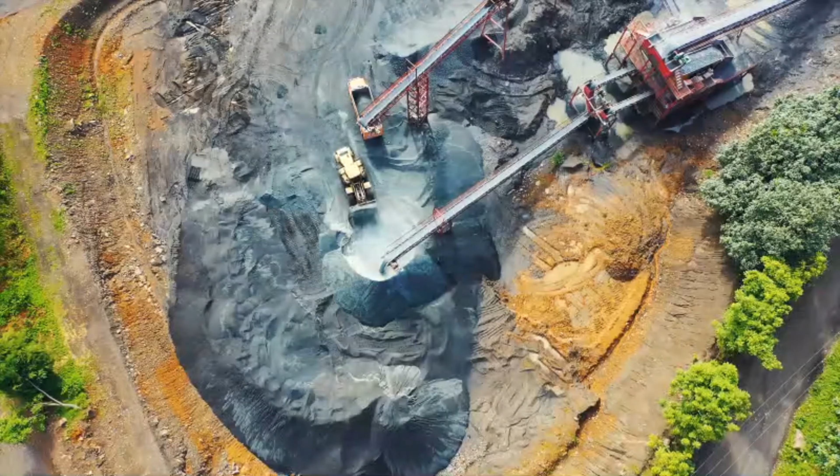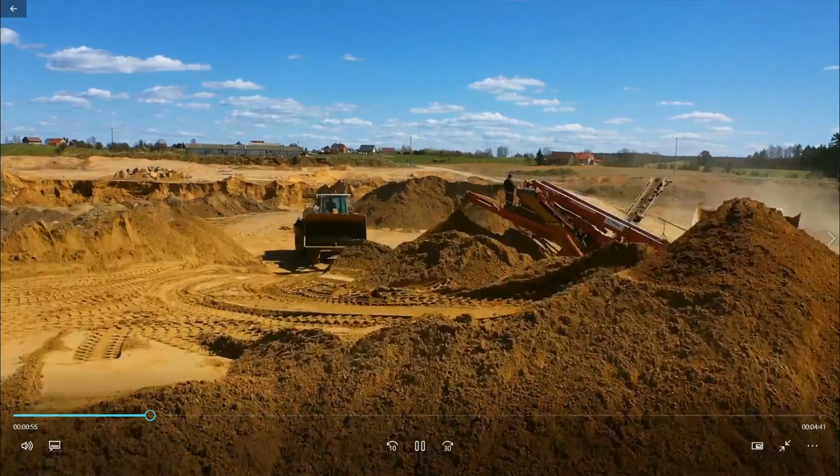But what if we could reduce CO2 emissions from the construction sector by cutting the amount of energy use in building construction and operations? What if we could predict the amount of virgin materials needed before they enter the life cycle of buildings? In this vision, architects, civil engineers, real estate developers and building managers could apply circular economy principles and digitalization to analyze material flows throughout the life cycle of buildings and find opportunities to reduce waste by reusing and recycling materials. The Circular EcoBIM project aims to enable a circular construction model through Building Information Modeling, or BIM.

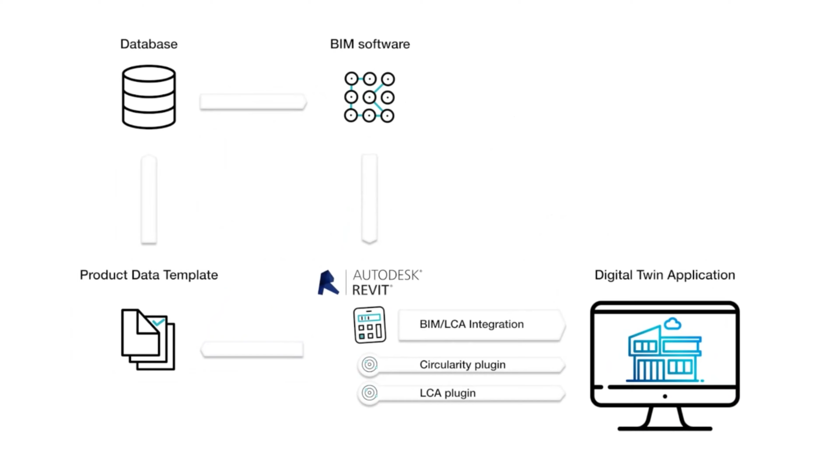The Circular EcoBIM platform integrates BIM tools with the principles of circular economy and the new sustainability framework for buildings called Level(s) Framework from the European Commission. The Circular EcoBIM platform consists of different components for building analysis: plugins for existing BIM software to calculate the circularity and perform a life cycle assessment, a digital twin application, and a database. The platform is demonstrated through a case study provided by Vic Properties, one of our partners.

The Herdade do Pinheirinho, a real estate development located in the Alentejo region of Portugal. The site is 200 hectares big, and 197,000 square meters of holiday villas and other infrastructure will be built.

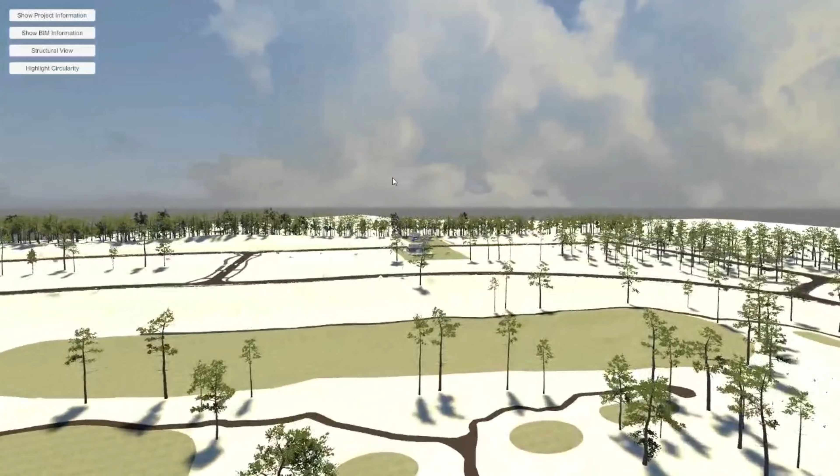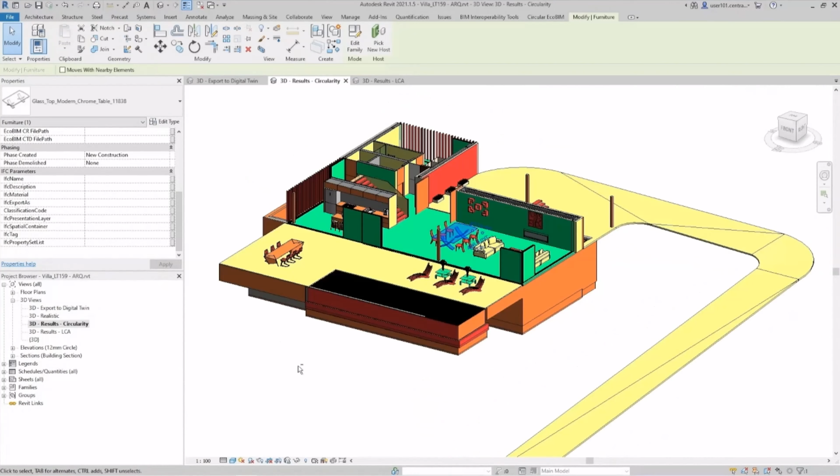The Circular EcoBIM team used laser scanning to create BIM models of the land of Pinheirinho and 3D technology to model the future villas. The goal is to maintain and use these models throughout all building life phases. The BIM models allow the extraction of material quantities and constructive environmental characteristics of products and materials. This information is the basis for a circularity assessment and life cycle analysis, which improve the understanding of a building's environmental performance.

The two plugins for calculating circularity and life cycle assessment are being developed for Autodesk's Revit BIM software. The Circularity plugin analyzes the circular potential for construction and renovation of a building. It allows 3D visualization in the BIM model per construction element, and generates a circularity report indicating the origin of the material and potential end-of-life strategy.

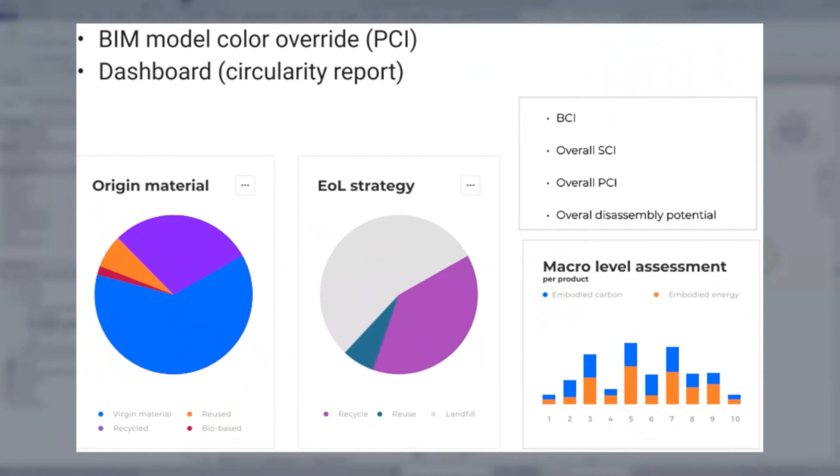The Life Cycle Assessment plugin uses environmental indicators from the database and the building geometry from the Revit model to analyze the impacts of a construction or renovation project. It allows different types of sustainability analysis with a varying range of indicators, depending on the project and user needs. An economic analysis is part of the plugin, which calculates the life cycle cost of the BIM model.

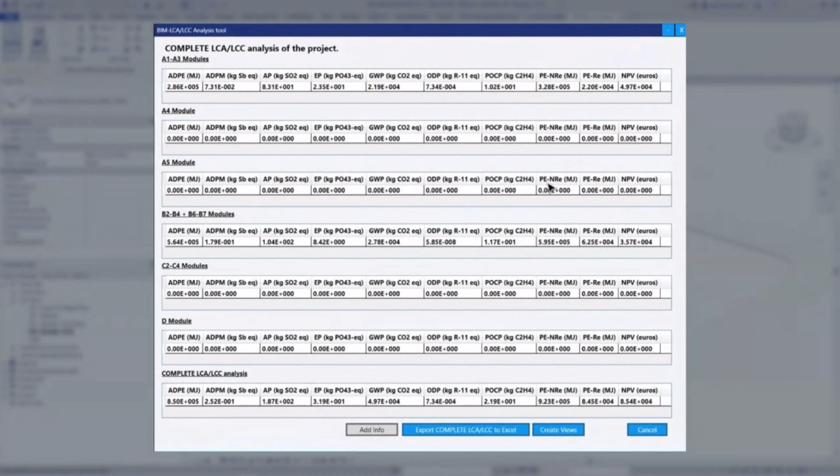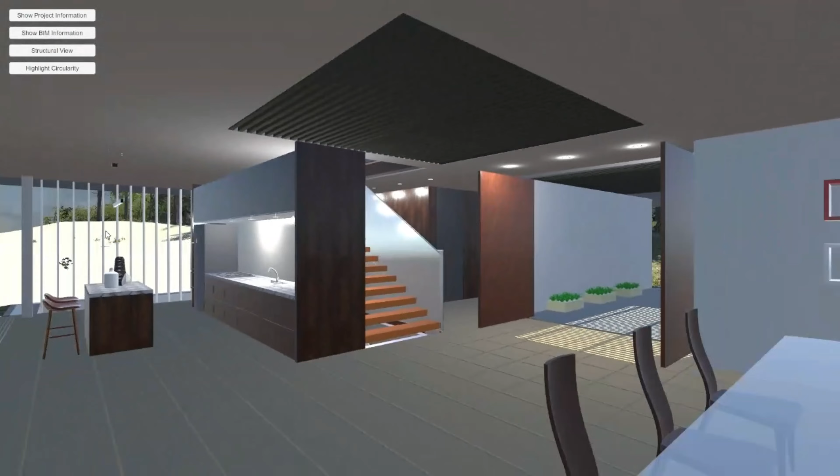A digital twin application visualizes the circularity of materials, use of potentially recoverable materials, and increase of sustainability measures in a realistic building model. The digital twin application also analyzes the circularity potential during the building's use phase. It enables different user functions, including 3D navigation, highlighting the illustration of impacts related to different construction elements through a color scheme.

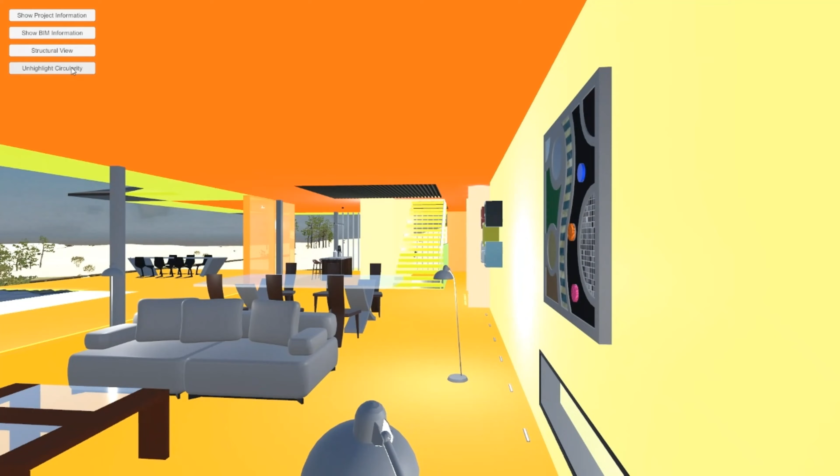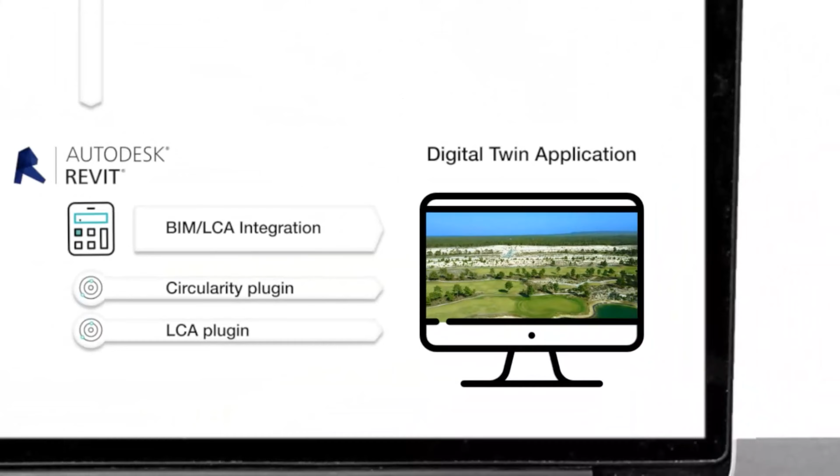Circular EcoBIM aims to help architects, civil engineers, real estate developers and building managers to uncover opportunities to redirect material flows from linear to circular, as well as making early assessments of potential environmental impacts associated to new building and renovation projects, effectively cutting the amount of energy use in building construction operations. And in doing so, reducing CO2 emissions from the construction sector.

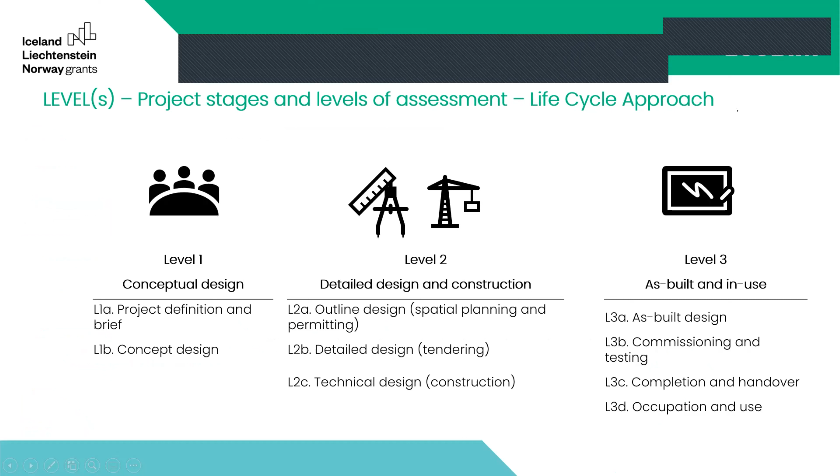So I would like to give you a couple of additional pieces of information that I think are helpful to understand the following presentations. One of these is a better understanding of the levels framework, which was also already mentioned in the video. The levels framework is a framework by the European Commission on Sustainable Buildings.

One of the big features of this framework is that they divide into building levels, so as the name suggests, level 1, 2, and 3. Level 1 is the conceptual design phase of the building project, which is the simplest level. Level 2 is the detailed design and construction phase, where you already have a better idea and can quantitatively assess the design performance of the building and also monitor the construction phase. And then level 3 is when the building is completed and in use.

And then, of course, you have all the details available, and you can monitor and survey activities while the building is in use. The distinction between these 3 levels is important for the different tools that are part of the platform. But we'll talk about this more in a bit.

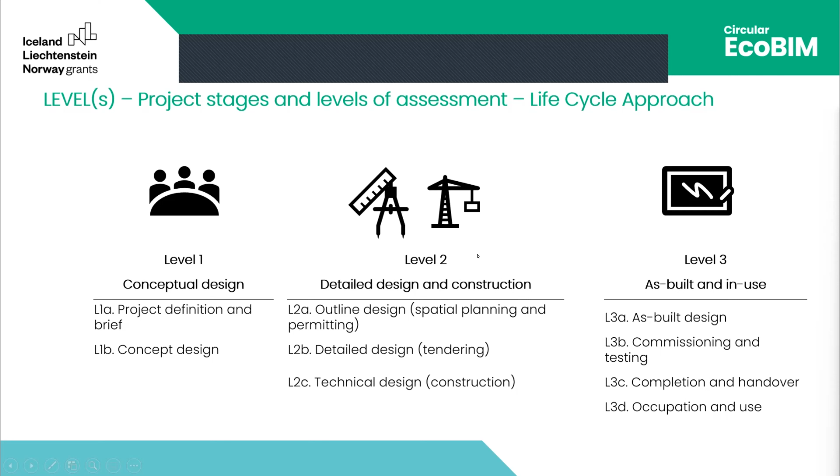So here again, an overview of the platform. You have different components: the database, and the 2 plugins, one for LCA and one for circularity assessment, and a digital twin application. We're going to focus on these 4 tools of the platform in the upcoming presentations.

So I'm going to start by telling you more about the database. Then I'll hand over to my colleague, Joana Fernandes, who is a PhD student at IST in Lisbon. She will tell you more about the circularity plugin. Then her colleague, Teresa Ferreira, also a PhD student at IST, will tell you more about the LCA plugin. And then our colleague, Rui Barata, who is a BIM expert, will tell you more about the digital twin application. As you can see here, the digital twin application is for level 3, and the 2 plugins are for levels 1 and 2, as described just before, referring to the 3 different levels of the levels framework.

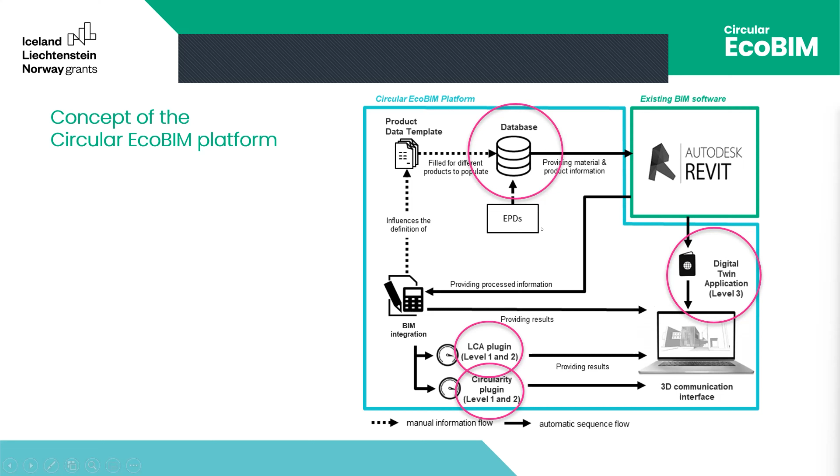Okay, but let's have a better look at the database. The database that we are building for the Circular EcoBIM project is a relational database, and we are following the methodology which you would typically use to assemble such a relational database. That starts by defining the objective of the database, which in our case is, of course, to provide the information for all the different parameters that are needed in the different tools, so that are needed in the circularity plugin, in the LCA plugin, and in the digital twin application. Then, based on that, we can identify entities, and an entity would be basically a table that consists of different parameters.

Then we identify the parameters, also called attributes of each entity. And then we map the relationships between the entities and attributes, and we write that down in an entity relationship diagram, which basically shows the structure of the database.

I'm going to try to explain this entity relationship diagram on the next slides, and I hope it's possible to understand, because it's quite a complex thing that involves a lot of information.

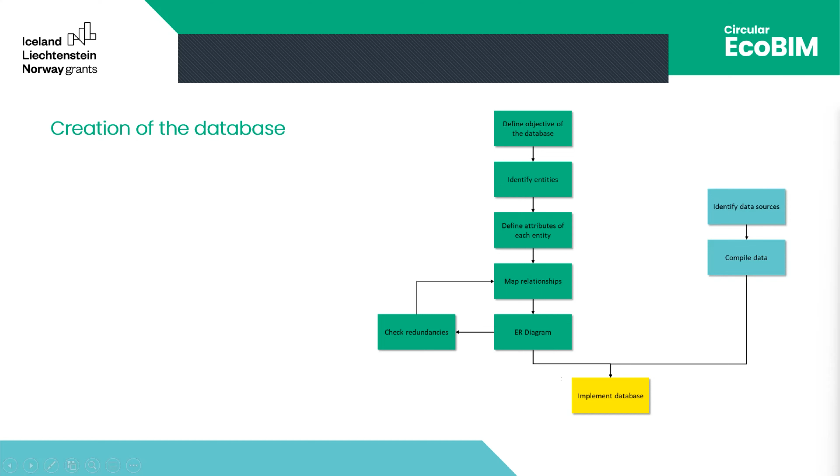That's the skeleton of the database, the structure, and then we have to fill it with information. For this purpose we identify data sources and compile the data, and then we can implement the database. Right now we've identified and described the entity relationship diagram and most of the data sources. However, as the project is still ongoing, we're still developing this further, collecting more information for specific parameters and extending the parameter list if needed.

On the next slide you can see an overview of the most relevant parameters needed to define the objective of the database. You can see them in this column, and here you can see there are different groups. What's important to understand is that we are collecting information about construction products.

A construction product could be a material, or already a pre-assembled product that consists of multiple materials and that you could buy on the market. So this can be a bag of cement, or a brick, or a pre-assembled facade element, for example. Because of that, we need to classify and categorize where this type of product can be used in the building, so that later on the database can be used in an optimized way to provide information for the different plugins. For that, we need to know where the type of product can be used.

Then we also collect metadata - where does the data come from that we're feeding into the database. Regarding the environmental indicators we're collecting, we note down the life cycle impact assessment method and so on. We also look up market prices of the different products by checking online what's the market value of product retailers for different types of products. And if a product consists of multiple materials, we note down the different materials it consists of.

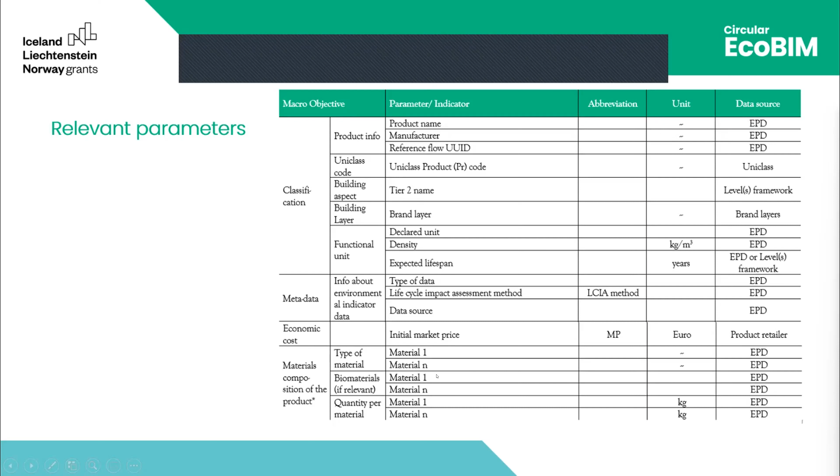On the next slide you can see this big list of environmental indicators. We have global warming potential, which is very well known, but we also collect all the other ones typically found in an environmental product declaration. Most of them are needed for the LCA. Some of them, like components for reuse or materials for recycling, are also needed for the circularity assessment.

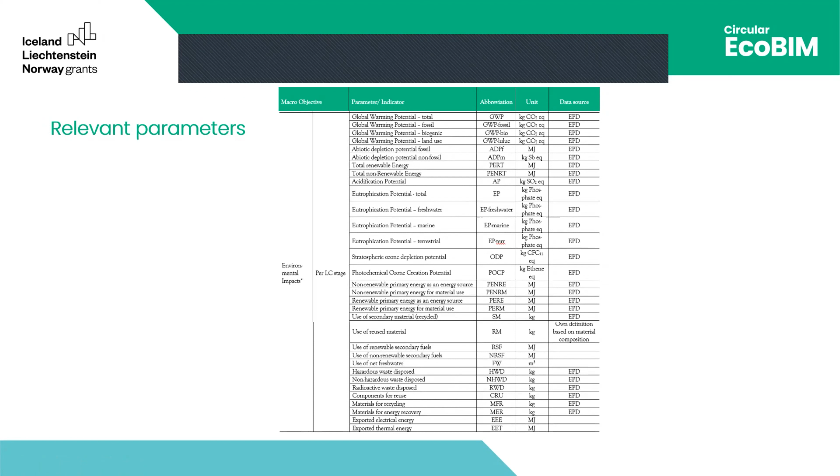And we collect all of this per life cycle stage. So we have, for example, global warming potential for the extraction of raw materials, for the construction phase, and for the end of life phase.

I would say this is the heart of the database - the products table. Here the name of the product is denoted, the manufacturer that produces the product in case the data is product specific. We have a Uniclass code - Uniclass is a standardized categorization system in the BIM community. We note that down, and we also note down the declared unit, which tells us what the other impacts or indicators in the database are referring to, in terms of how much of the product.

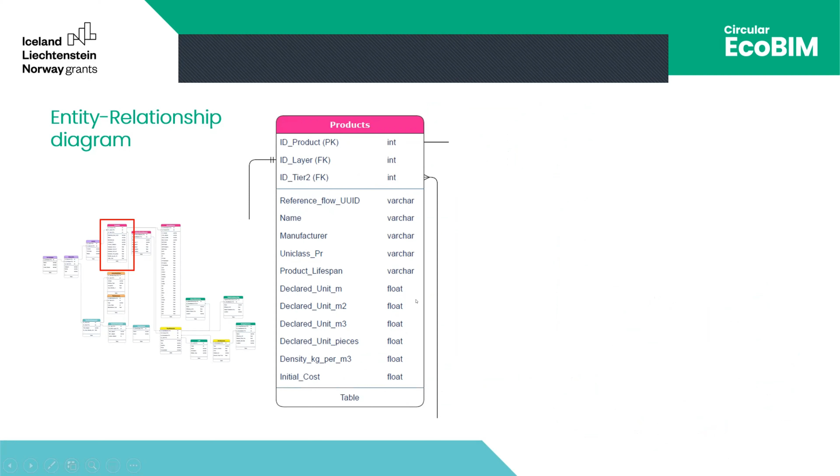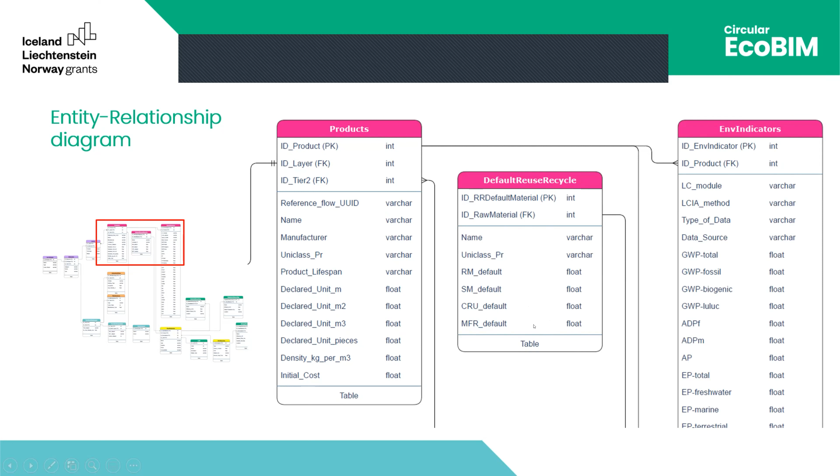This information for products is classified into layers, and the layers into building elements. The building elements are also used to define archetypes. The archetypes are an interesting feature of the platform because what we're trying to achieve is not just to improve the circularity of new construction projects, but also of existing buildings.

What can happen is that if you analyze a historic building, or an older building, you might not have all the information available about the materials that actually make up the building. Then you might want to use one of these archetypes to get an estimate of what you're dealing with.

We have tables on the intensity of use, which express the product-specific intensity of use compared to the market average. This also gives a clue about the expected lifetime of the product, an important parameter for the circularity assessment.

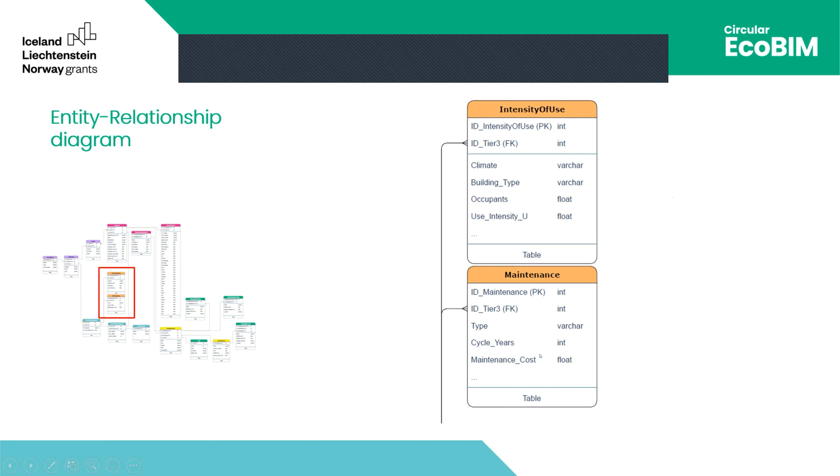We have a table on maintenance where we collect information on how often and how intensely we need to renovate building elements. These three tables then classify the different products into building elements using the levels framework and the brand layers. I have another slide to explain this better.

We need levels and the brand layers to define the hierarchy of the building structure. What we're doing is looking only at the shell, specifically the three brand layers: structure, space plan, and skin. This could possibly be extended to other layers, but that's what we are focusing on. That includes the foundation, substructure, load-bearing structural frame, non-load-bearing elements, facades, and the roof.

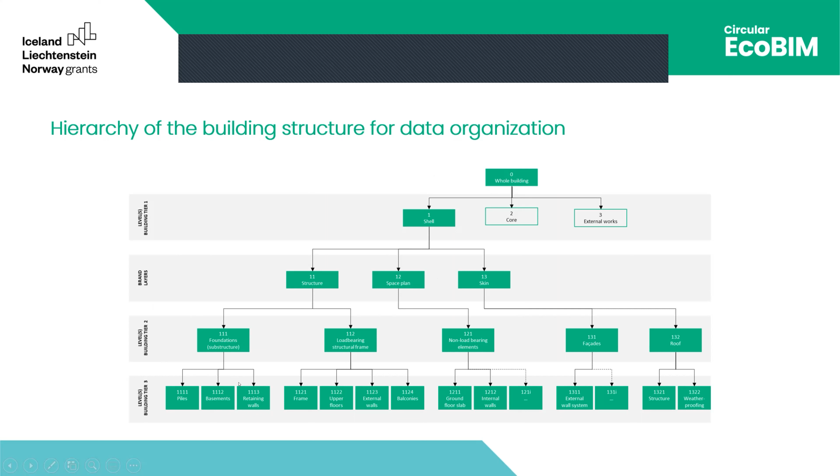We're following this structure because we believe it's very useful for building practitioners who also want to follow the new norms and legislation by the European Commission.

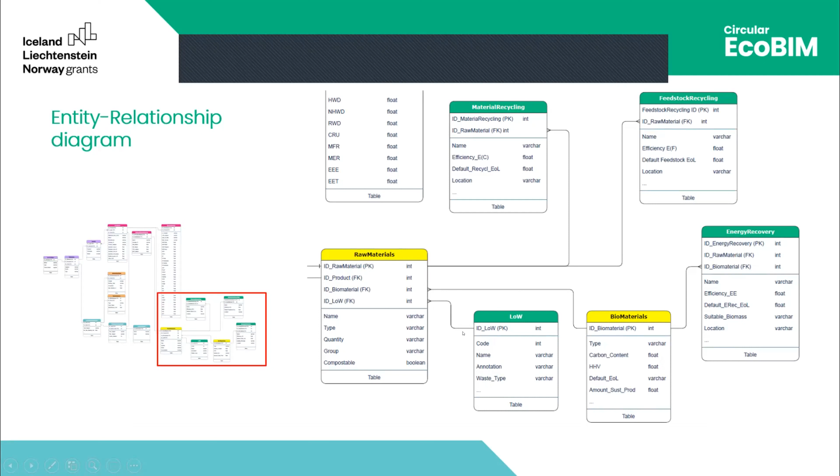This is linked to the type of raw materials that the product consists of, and it needs to be classified by the level of waste that occurred at the end of life of a product, and for which type of material. We also specifically look at biomaterials, which are interesting because of their stored carbon content and higher heating value.

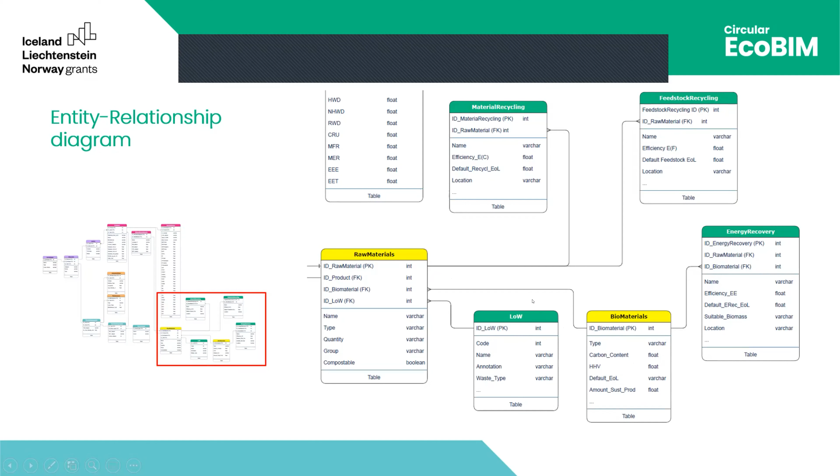I hope this was not too confusing, but this creates the basis for the following presentations. I'm going to hand over now to my colleague, Joana Fernandes, who will tell you more about the circularity plugin.

Joana, do you want me to share the slides, or do you want to share them yourself? Sorry, maybe I can share, please. Of course, of course. Please go ahead.

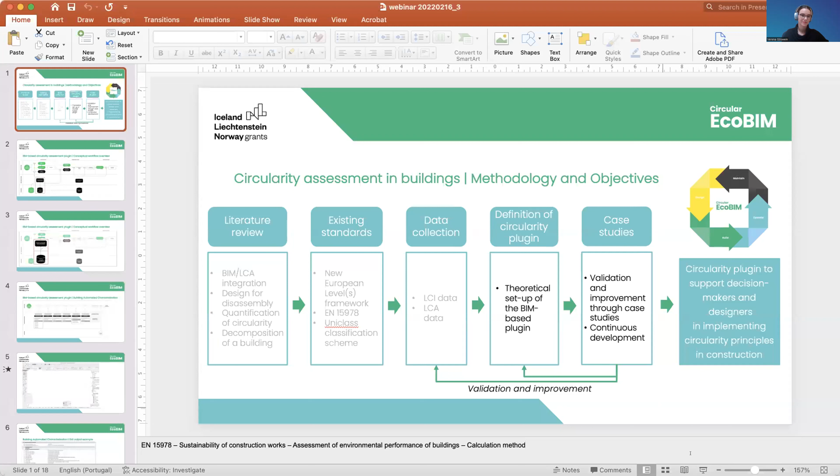Hello everybody, my name is Joana Fernandes, and I'm going to talk to you about the circularity plugin. This is the global methodology we have adopted, which was already explained in the last webinar.

We started by doing a literature review on BIM-LCA integration, design for disassembly, quantification of circularity, and decomposition of a building, together with existing standards — namely the new European levels framework that Verena already mentioned, EN 15978 on sustainability of construction works, and the Uniclass classification system, a classification system for construction elements that we are going to use for circularity assessment.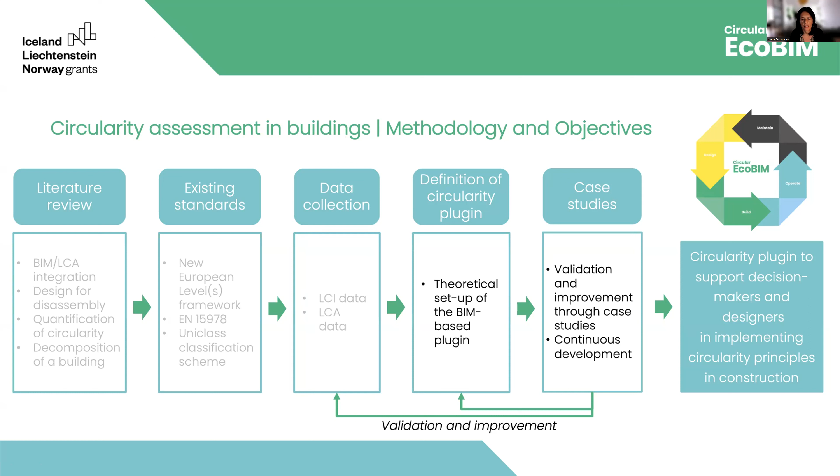We have also been collecting LCI and LCA data, and now we are defining the circularity plugin, validating it, and improving it through case studies. Our goal is to create the circularity plugin to support decision makers and designers in implementing circularity principles in construction.

So starting from the BIM-based plugin, this is the conceptual workflow — an overview. Starting from the top left, the design team has a new project. It can be a new building or a refurbishment project.

The workflow is exactly the same, except for the existing building, because it is more challenging, as Verena mentioned, since sometimes we don't know which materials the existing building has, and we cannot destroy it partially to find out what the constructive system is. So when we start the project, we create the geometry and assign this Uniclass code to the construction elements.

If it is an existing building, we assign the constructive characteristics. When we don't know them, we can perform this building automated characterization, which is based on archetypes. This characterization is linked to a building characterization database.

How does this work? The archetypes are theoretical models based on statistical information combined with literature review and some real case studies to test this methodology. So the user starts by answering some questions in order to determine which archetype the building belongs to.

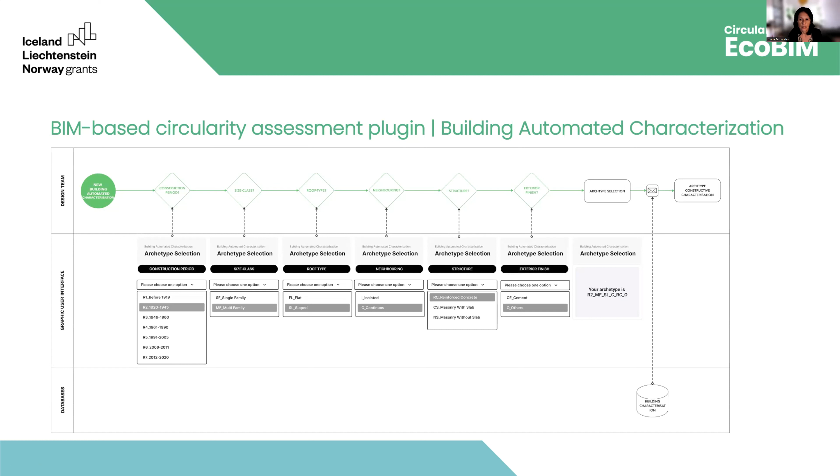The first input is the construction period, then the size class—single family or multi-family building—the roof type, flat or sloped, whether it is an isolated or continuous building, the material of the structure, and the exterior finish. With this information we get the archetype code.

I'm going to show you a little video. This is a graphic user interface in ArchiCAD, because we started developing this plugin in ArchiCAD, and now it is being programmed in C# to be used in Revit.

So here it goes. You select building automated characterization, then you answer the questions I explained: period of construction, multifamily, sloped roof, continuous, the structure material, and also the finish. Then you get this list of materials.

I don't know if somebody has the mic on.

Here you have on the left the shearing layers that Verena mentioned, together with the constructive elements, and on the right all the materials that characterize these construction elements. You can see these chains on the left, and if there is some construction element that does not match the default value, you can change it, as shown.

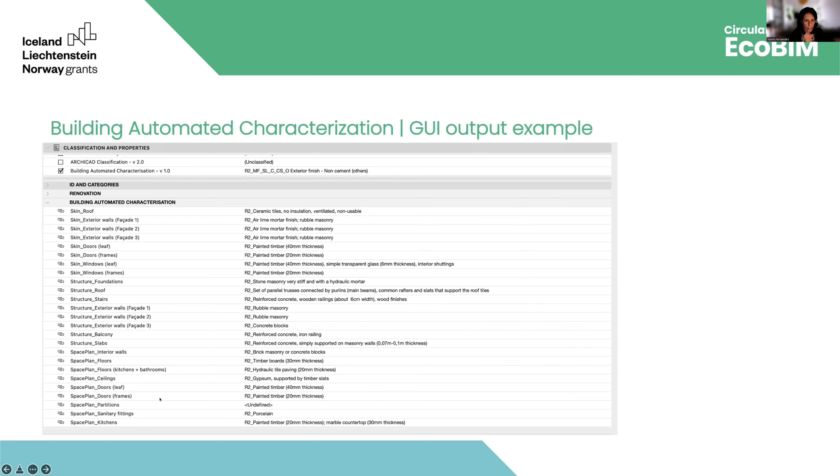So this is the output table of the building automated characterization, which is what we have seen. Here you have the shearing layers, the building, the construction elements, and here all the materials and constructive systems of this type of building.

Now, after knowing all the characteristics, creating the geometry and having the BIM model, we need to identify which elements are going to be maintained, demolished, or introduced. In case of new construction, which elements we are going to create. This is also very important to assess circularity—we need to know how these elements are connected, how they are assembled. This is what this red-black box shows: the disassembly information.

So this is, once again, the graphic user interface of ArchiCAD, and the designer has to do this for each construction element to characterize all the connections between these elements.

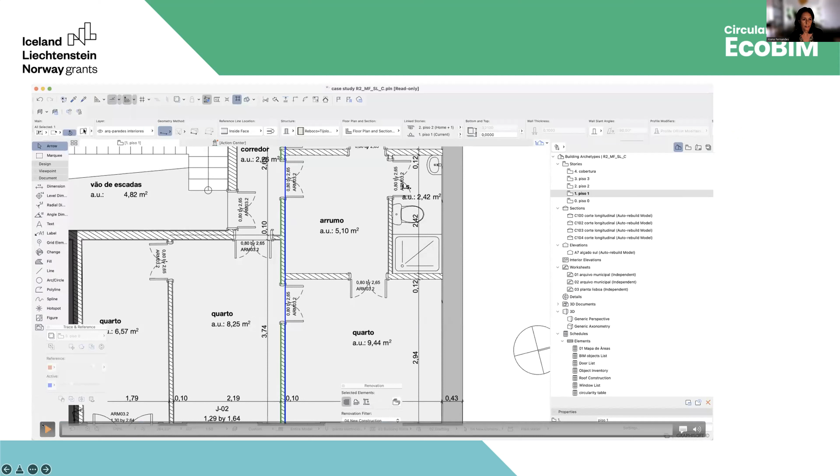I'm going to show you another video where you can see how this is being developed. In this case it's a wall that is highlighted here, and then you open the dialog box, select DFD, disassembly information, and characterize the connection here—if it is dry, with added elements, or a hard chemical connection.

Then you answer some questions necessary to calculate circularity: what is the end of life strategy—recycled, reused, etc.—if it contains recycled or reused components, and further information on the disassembly, what kind of hard chemical connection it is, its accessibility, crossings, the form of containment, if it is closed on several sides, and the elements connected to this construction element, like doors, ceilings, and floors.

Here you have the summary table of the disassembly information, the shearing layers on the left, the construction elements, and all the information regarding each one of the construction elements of the project: the adjacent elements, the connection type, accessibility, crossings, and form of containment.

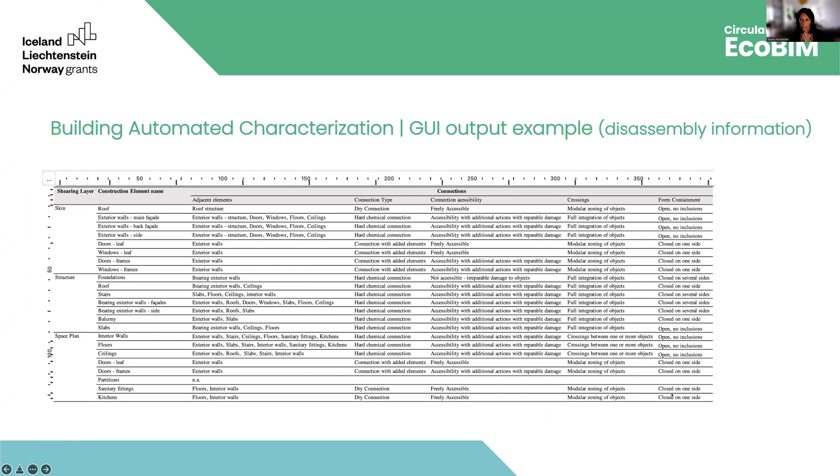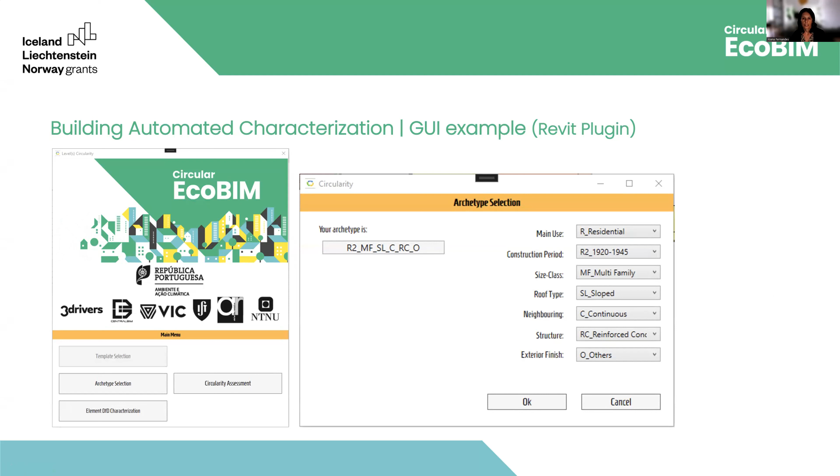We also bring you here some screenshots of the Revit plugin that is being developed in C#. This is the graphic user interface of the archetype selection. This is also the archetype selection with a model on the back. This is already in Revit.

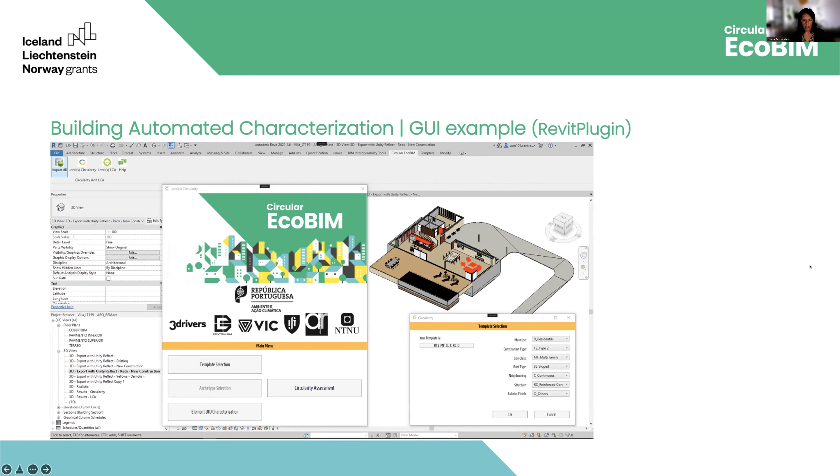And here, that is an innovation: this is the template selection. These are not archetypes, but the team has decided to create a predefined library of construction elements so that the designer, when creating a new building, can choose predefined walls, ceilings, or floors to make it easier and faster to assess circularity. You can, of course, still change or create from scratch—this just facilitates and speeds up the process.

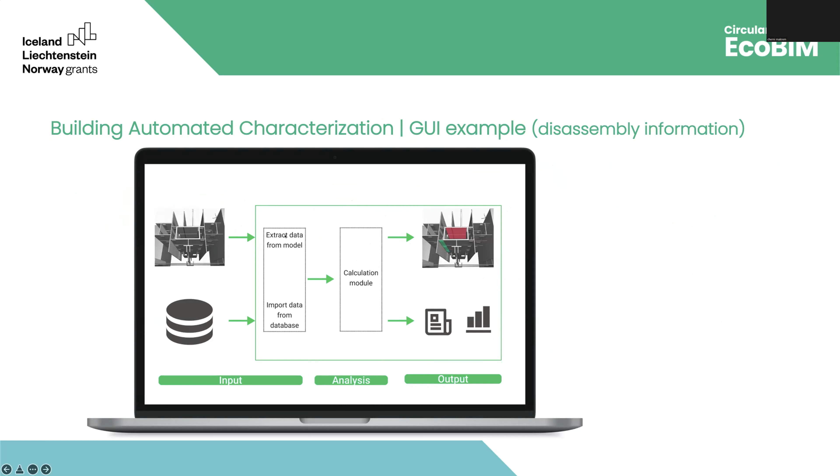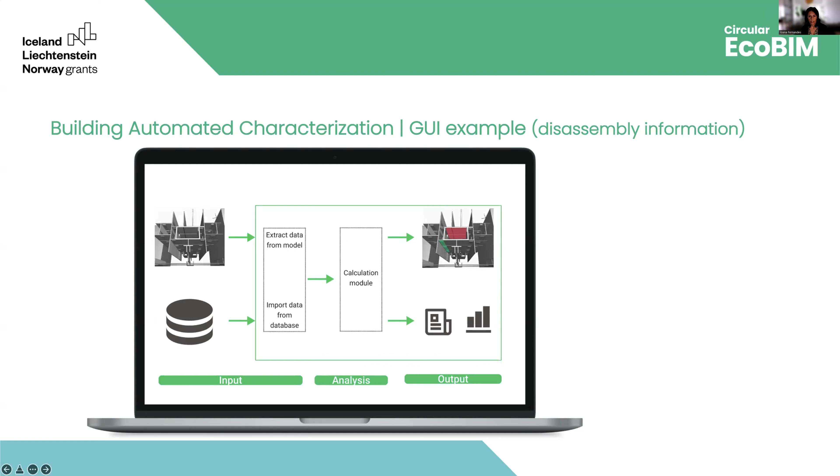Then we start doing the building circularity assessment itself, which is connected to the database that Verena has already explained. We are working on this part now, so it is still under development. What we are going to do is have a calculation module in the center that gets information from the BIM model and from the database, and the output will be a 3D view of the model with colors regarding the level of circularity, plus a report.

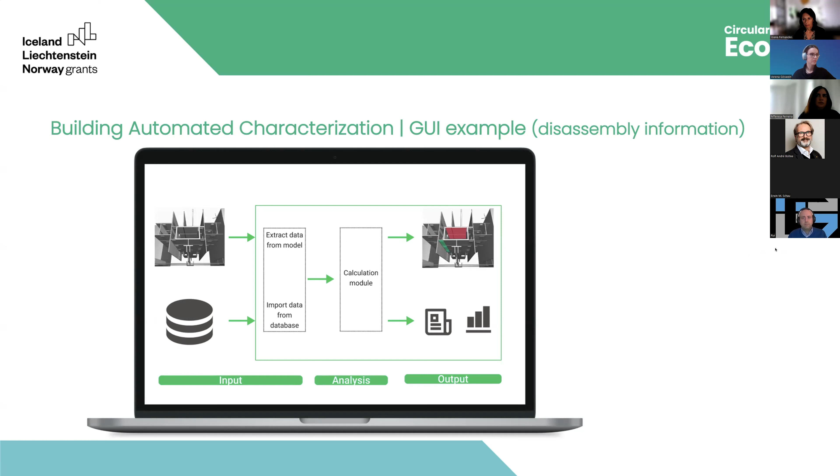We are also working on obtaining this information, the original material, the end of life strategy, all the circularity indicators from the product until the building. And we are also doing this macro level of assessment by calculating the embodied carbon and the embodied energy.

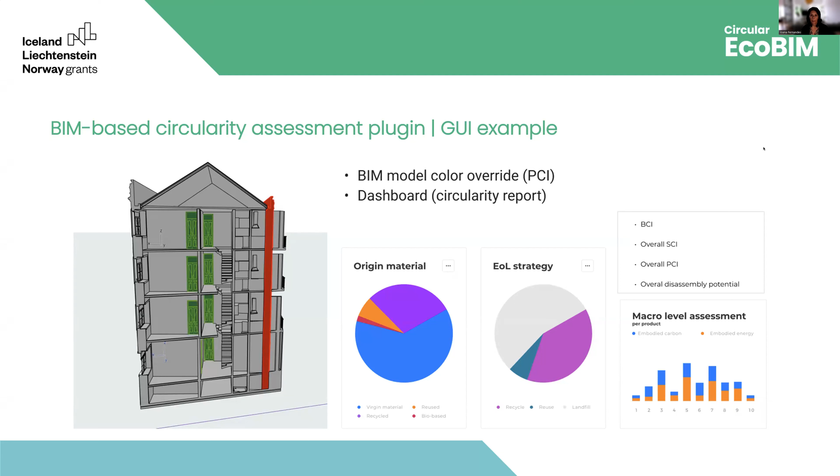After the circularity assessment, the designer selects the best option. The designer gets this information in real time and can change the project many times as he wants, and can perform this assessment every time he wants, and then detail the BIM model. After detailing the BIM model, the circularity assessment can be performed again and gets the optimized model.

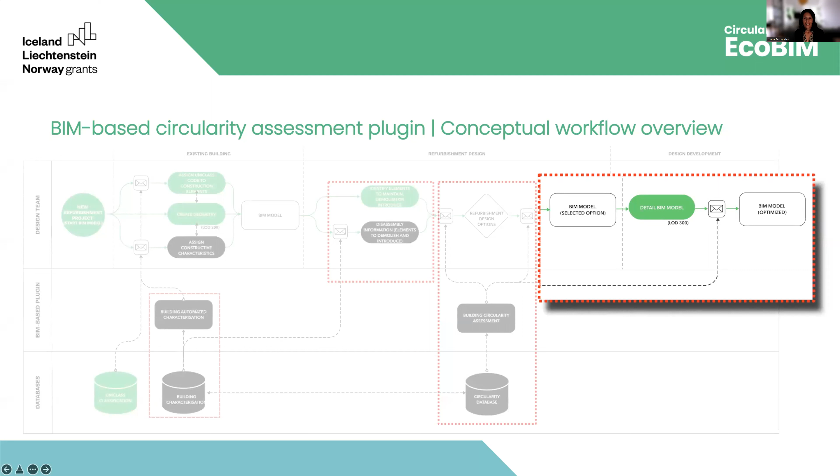I guess that's it. Now my colleague Teresa is going to talk about the LCA plugin. Thank you.

Thank you very much, Joanna. Can you see my screen? Yes, yes.

Thank you. I'm going to present the Level(s) LCA plugin. As mentioned by Verena and by Joanna, this is based on the Level(s) framework developed by the European Commission.

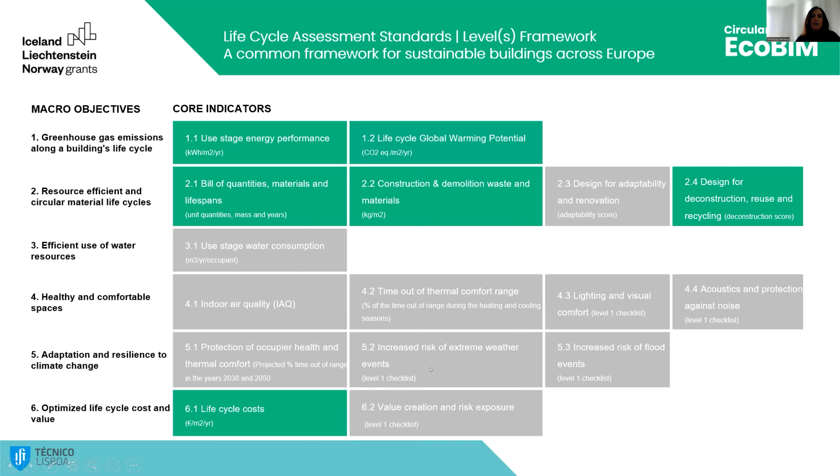Regarding the LCA plugin, from the 6 macro objectives from Level(s), the important ones to take into consideration are: first, greenhouse gas emissions along the building's life cycle, which takes into consideration life cycle global warming potential. The information is analyzed having in consideration the bill of quantities and materials from the BIM model during this lifespan. We will also analyze macro objective number 6, which is the life cycle cost.

The LCA plugin has 6 functionalities in total: Streamline LCA, Complete LCA, Level(s) LCA, Carbon Footprint, Level(s) Global Warming Potential, and also Costs for life cycle costs. Each of the analyses has several environmental indicators and economic indicators on the cost analysis that are inserted into our plugin to perform each of the analyses, as you can see in this image.

This plugin's Level(s) framework is aligned with the stages of the project where we are.

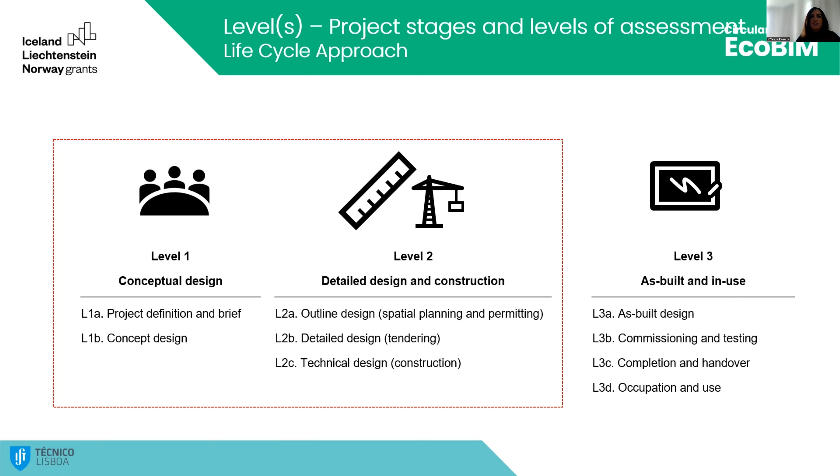The LCA plugin covers level 1 for conceptual design and level 2 for detailed design and construction. On level 1, there are yes/no questions to be asked to the user, and a brief description that could be added. On level 1, information couldn't be quantified - we don't have quantified information.

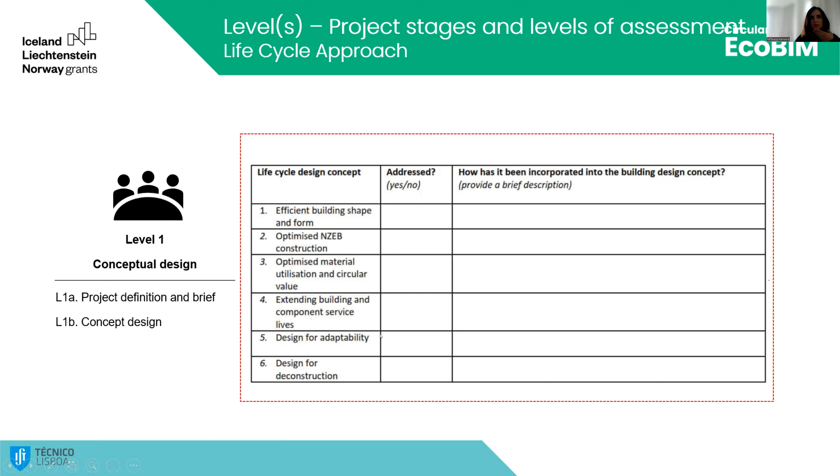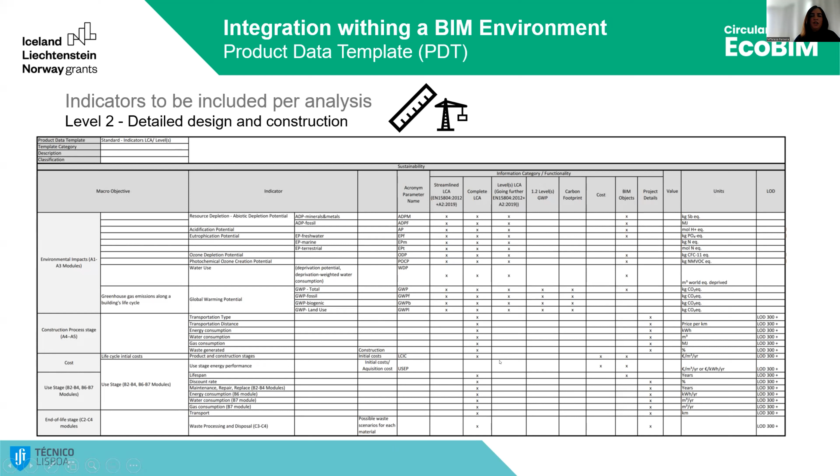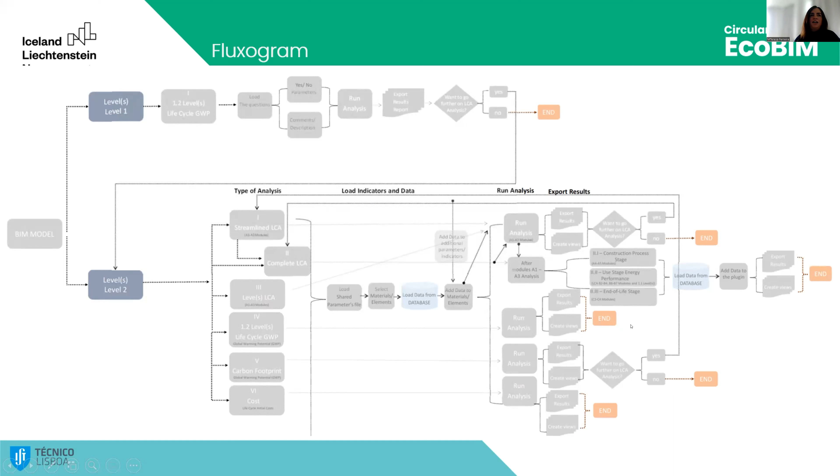If you pick, for example, streamline LCA, you go through all the analysis until the end, and if you want to go further on the end analysis, you can come back and do a complete LCA. Complete LCA is the last one, the more complete one. The same goes for the levels global warming potential - if you do the analysis until the end, you can finish and go back to the streamline LCA.

I will now show a video of the LCA plugin working.

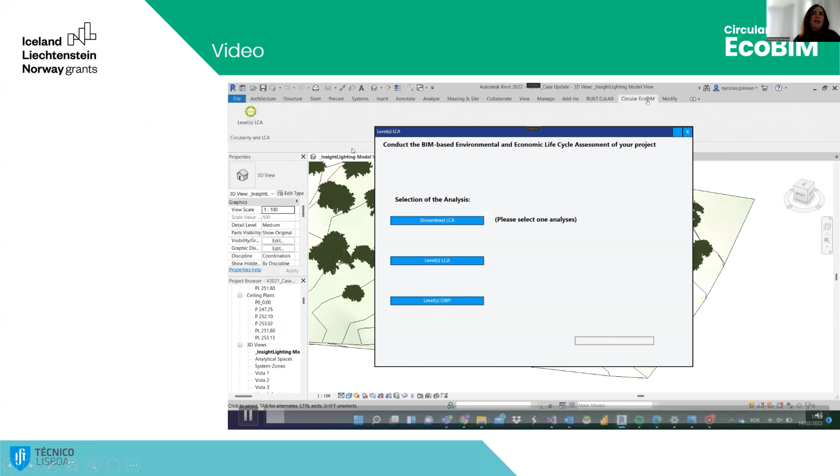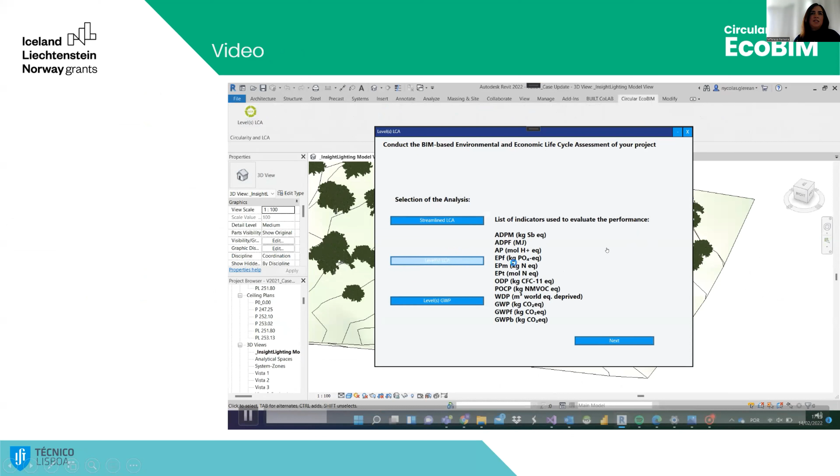You go into the Circular EcoBIM tab, pick Levels LCA plugin, then select the analysis. Now Levels Global Warming Potential is selected. You can see the list of indicators used to evaluate the performance. Another option is Levels Lifecycle Assessment, and here it is the list of indicators used to evaluate the performance.

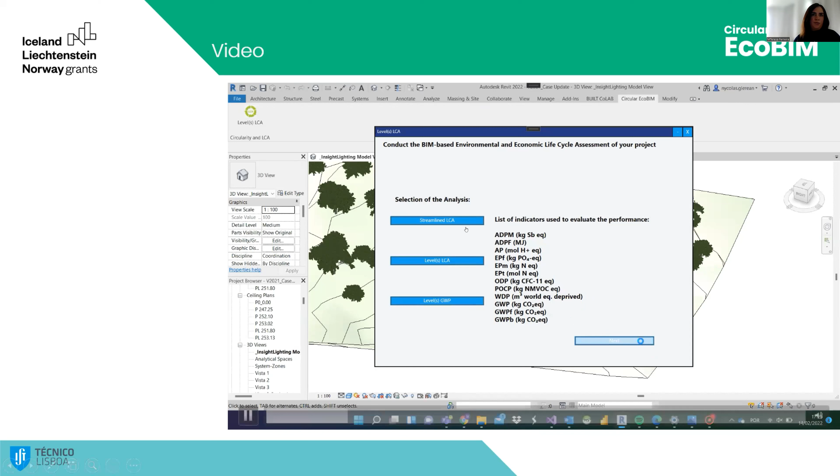Streamline LCA is another option of our functionalities. We will pick Levels LCA and go next. It includes the information in materials or elements that are actually modeled in the BIM model. They are loaded into the plugin, and the indicators or parameters are loaded. Then you select a material and add the information to the material, including the acquisition costs. After that, the information from the material is added to each element and you do the final calculations with all the materials that are covered, for example, in a wall.

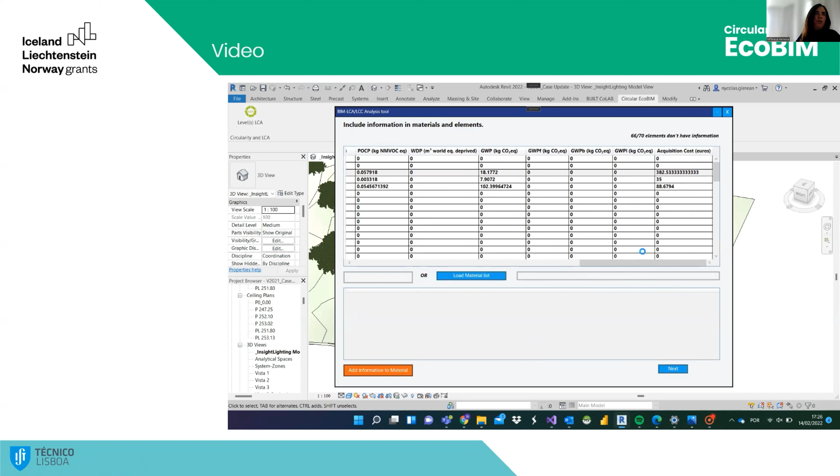It is also possible to add the information directly to an element or a product, as mentioned by Verena, or a window, a door, that combines all the information. Then you press next, and all the environmental and economic information is now in the project. You can see the types that we have for walls, doors, windows, and also the listed materials, covering all of our environmental indicators and cost indicators.

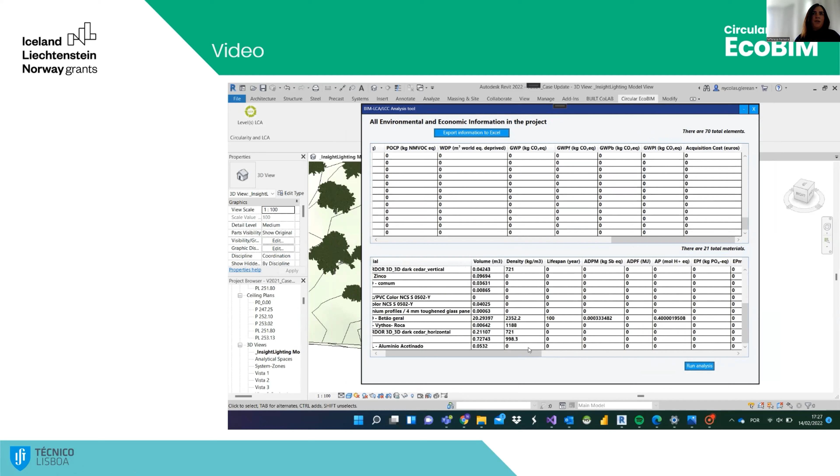In this project, for example, we have a total of 70 elements. Now, click Run the analysis.

These are the analysis results, the total environmental impacts and acquisition costs of materials of the project on the first schedule. And on the second schedule, you have the information detailed by element.

You can also see the LCA results and acquisition costs per element. For example, here we are selecting a wall and see the list of all the walls presented in the project. The same can be done for windows, doors, floors, roofs, any other kind of elements.

Then you create the views. Select the button to create the views. It is also possible to export the streamlined LCA to an Excel file.

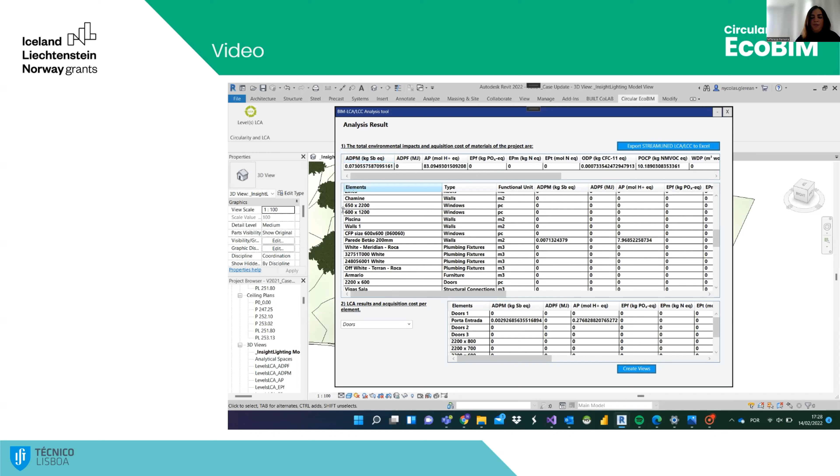We are now creating the views for all the environmental indicators, and we will show in detail ADPM, that stands for abiotic depletion potential of materials. Select the 3D view,

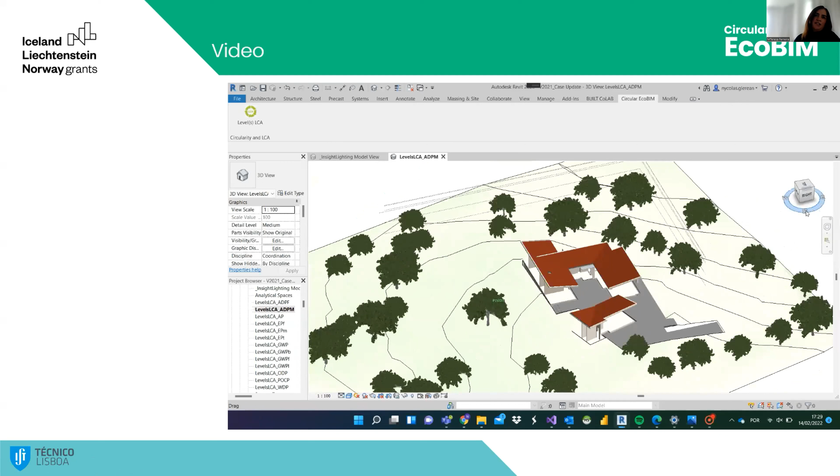and you have a color scheme that represents the impact that it has. We can see the walls here on this example. If it's green, it has less impact. If it goes to red, it has the highest impact on the model.

If you pick a wall and go to edit type, you'll see on the type properties the environmental indicators converted into parameters on the Revit elements, and this contains the actual information and calculations for each indicator.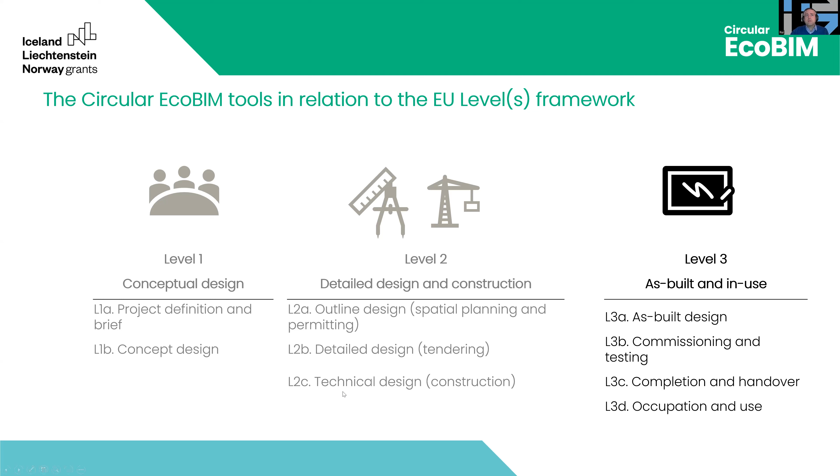The Revit plugins are level 1 and 2 tools that permit the calculation of circularity and do the LCA assessment. The database stores information about various building life cycle parameters and circularity information of materials, and permits communication between the Revit plugins and the digital twin.

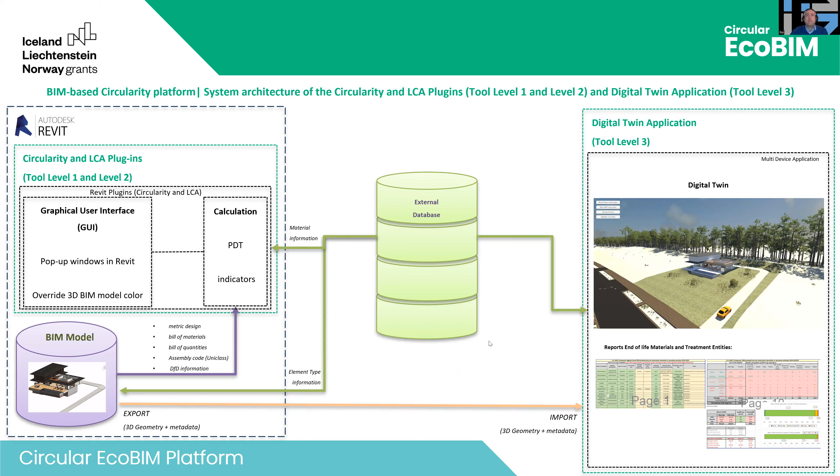So, the digital twin application has generic visualization and interaction features, seeing different disciplines like architecture, structure, mechanical, and plumbing, navigating in any space of the building, interacting with the elements and accessing all the information in terms of materials and geometry, like volume, area, etc. It identifies the building elements with colors, with the color scheme we choose to indicate, for example, the calculated circularity levels or LCA.

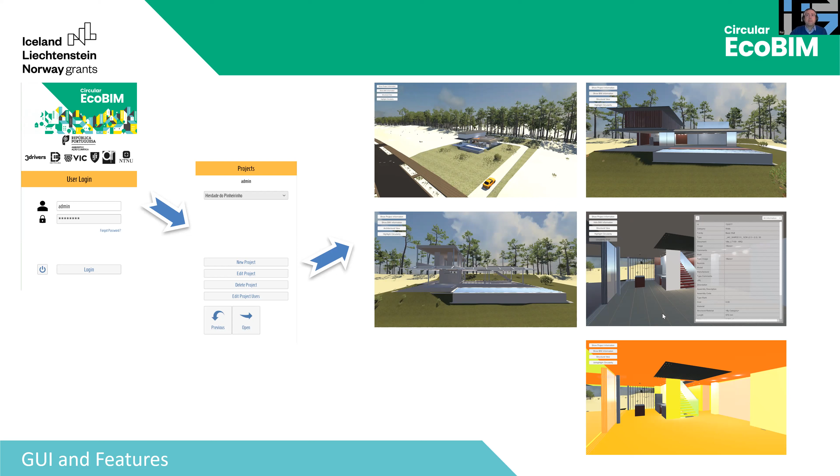So, a little bit more deeply, the digital twin aims to help users manage materials from our building in all the operation phase.

We can imagine our building being renovated along its life cycle, and there are materials that we have to manage. What we don't want is to put all the materials like waste in a dump.

The main features, the main functionalities of the digital twin application are: we are able to import an as-built digital twin, a replica of an as-built model that contains all the 3D geometry and information data from existing building elements.

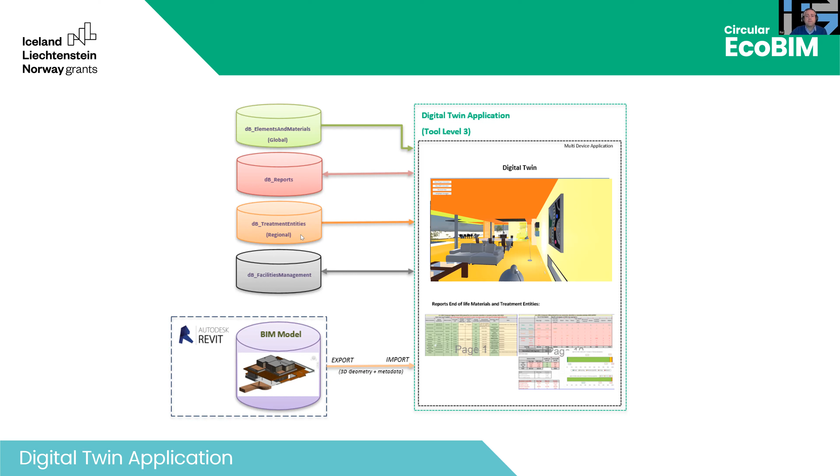Our goal is to create a graphical user interface that must be as simple as possible. We are trying to implement the best way to treat the materials that the theory gives to us, and we have implemented a color scheme to try to represent in a visual manner this best way to treat materials or elements.

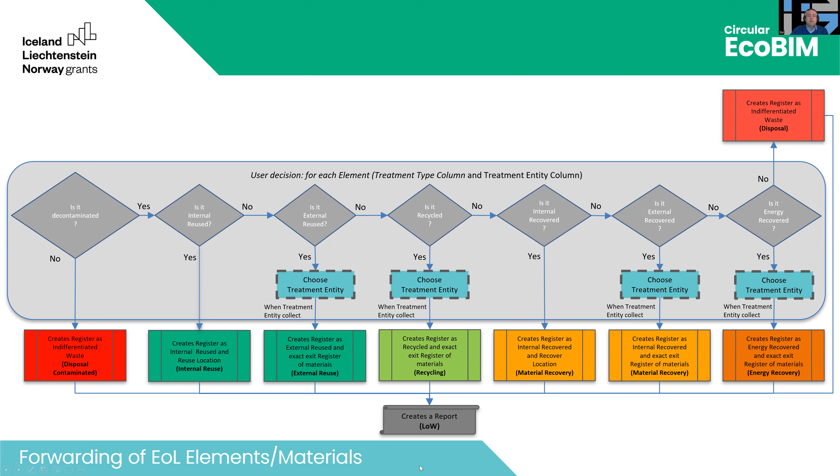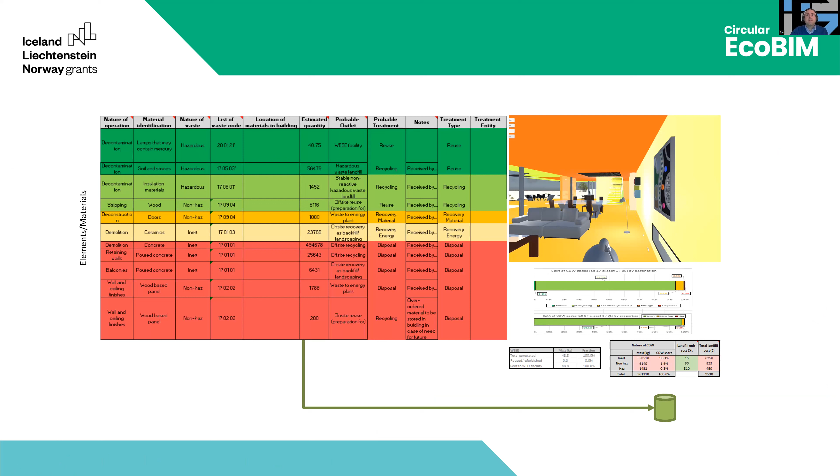This is our goal. At this moment, we can tell that our application has all the functionalities executed, but we don't have the graphical user interface already as organized as this, though we want this kind of arrangement.

At this moment we have already developed the representation with colors, like this table. We have the possibility also to represent with colors the circularity levels for each element, and we will have graphs that represent, with the same colors, what are the treatment types for the elements that are going to leave our building.

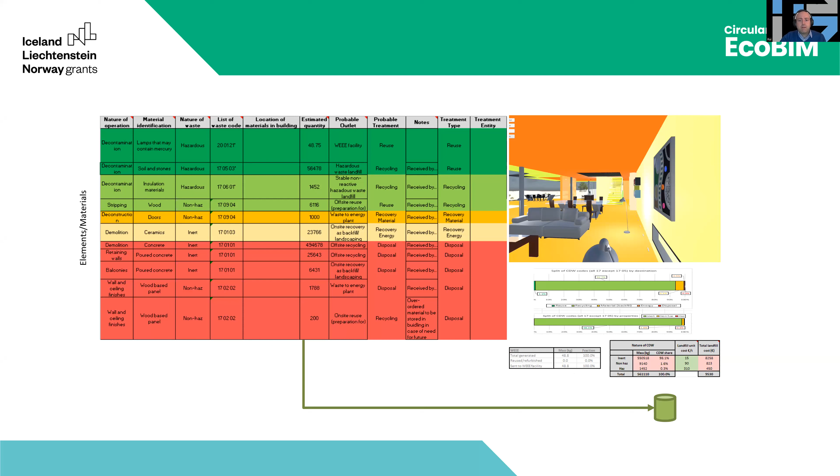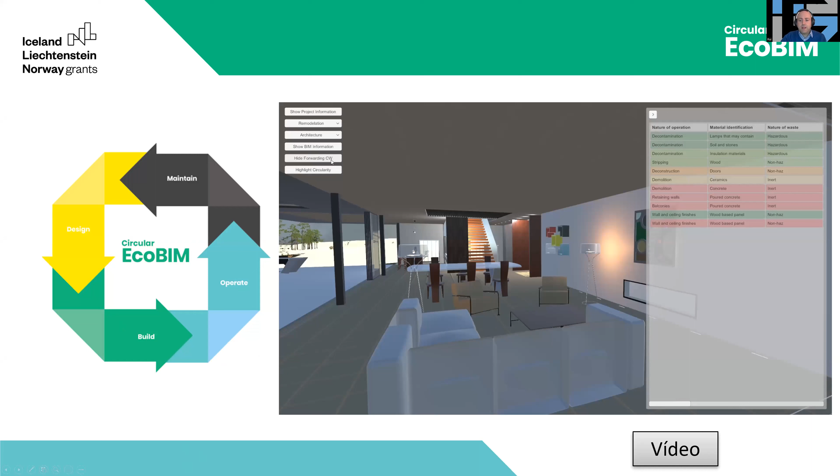Given this, I will just end by showing a video again to show a little bit more the stage of our application. This is like our first video in our presentation.

This villa, this house, is on the land of Herdade do Pinheirinho, a big property of one of our partners. I will put it on play. This is one of the villas that will be constructed.

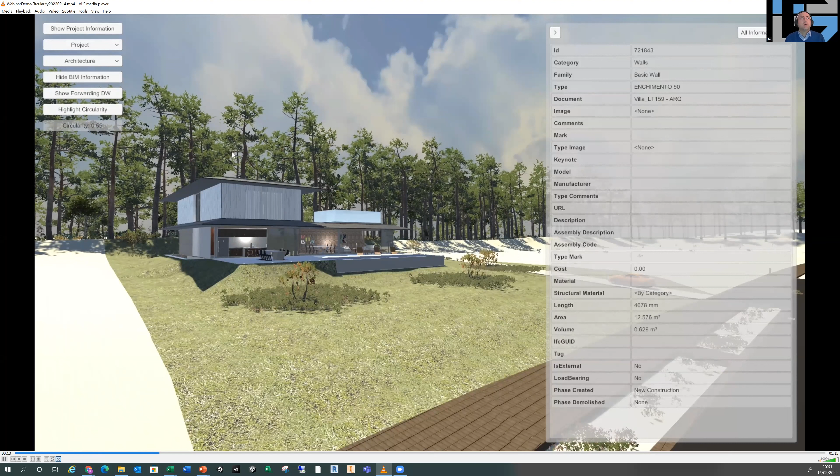So we can access, in this moment, like this video, all the BIM information for every element. We have the possibility to have projects that have different phases.

This menu here represents the actual state. We can access in this moment the actual state. The actual is that the land doesn't have any villa, any house, in this moment, but the project is this villa like we are seeing here.

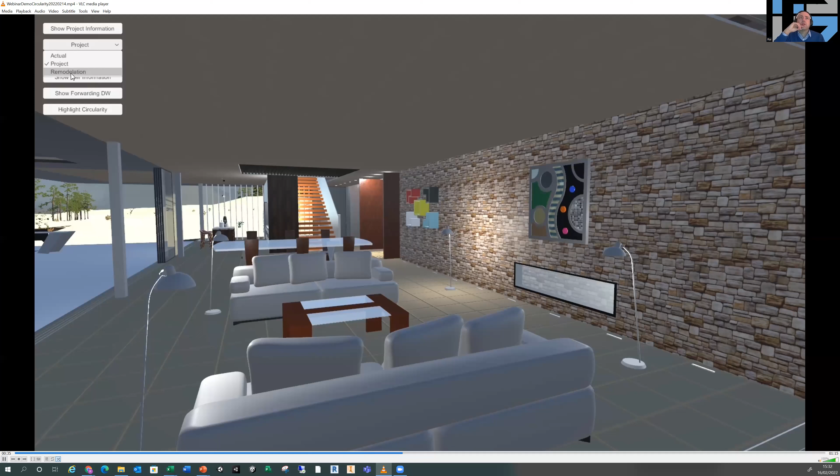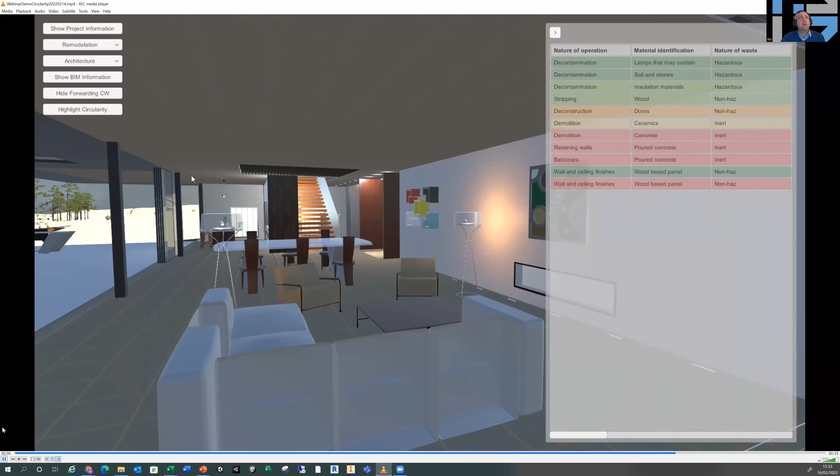But we constructed a model that represents a possible remodelation, a renovation, and this video shows this. This is just for the purpose of our study, our project, but it already permits us to have these tables with the representation of all elements and materials and the treatment type for each element, each material, and the finishing of this video is the representation with colors of the different elements regarding the circularity indicator.